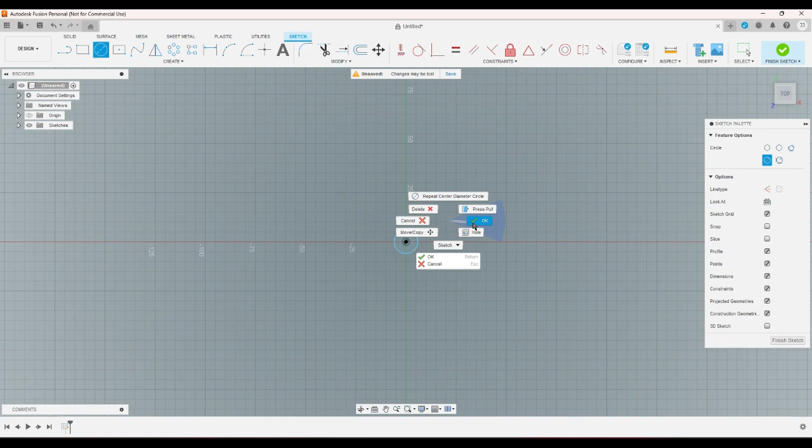So the idea was, I want to make a fan, like the kind that folds up and you open it, like those paper fans that you fold up and open and fan yourself with them. I want to make one of those, right?

But I want to make it. I obviously want to 3D print it, right? Because that's the tool I have.

Let's see, 110 would give me 220, which would be pretty big. Yeah, that'd be pretty big.

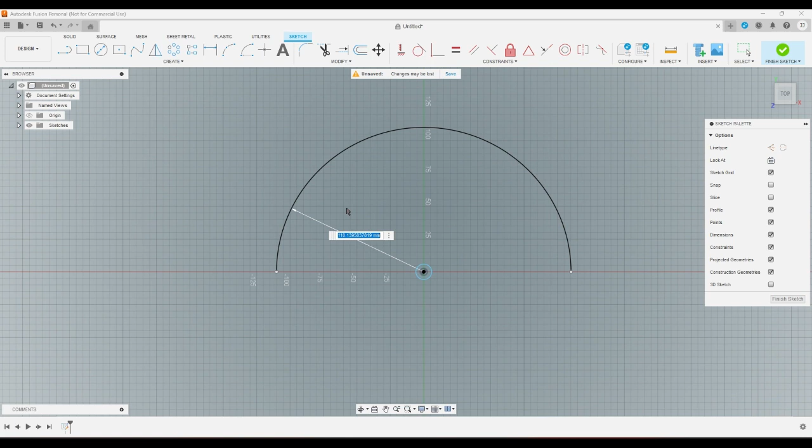Okay, so I want to make a fan, but the thing is, right, I usually make rigid things, right? But with the dividers that I've made for Yugioh, I've been making pretty thin dividers, which are like 0.6 millimeters tall.

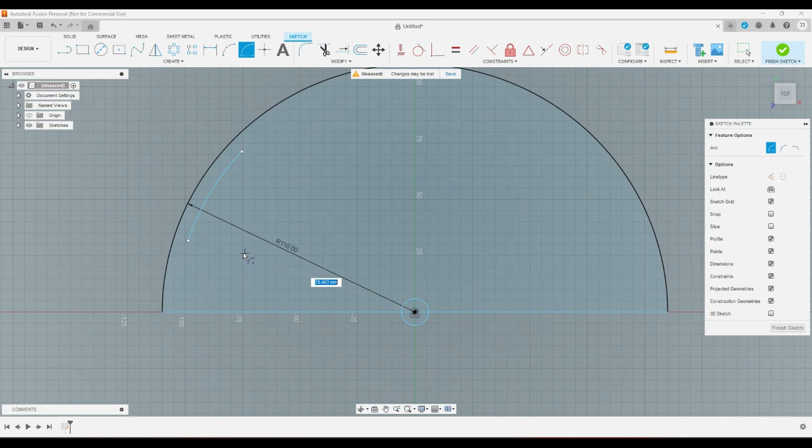So this is 220, yeah. So I wonder, right, if I can do something like this. I wonder if I can do... whoops, wrong kind of arc. Something like this, I don't know. There, and then there.

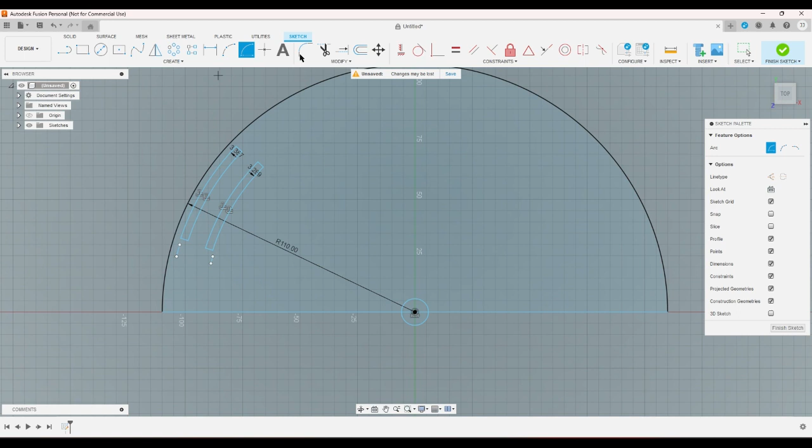So this would be a hole right here, and then to the side of this would be like this shape. And then this would be bigger, like that, right, it would go past the hole. And then... sure.

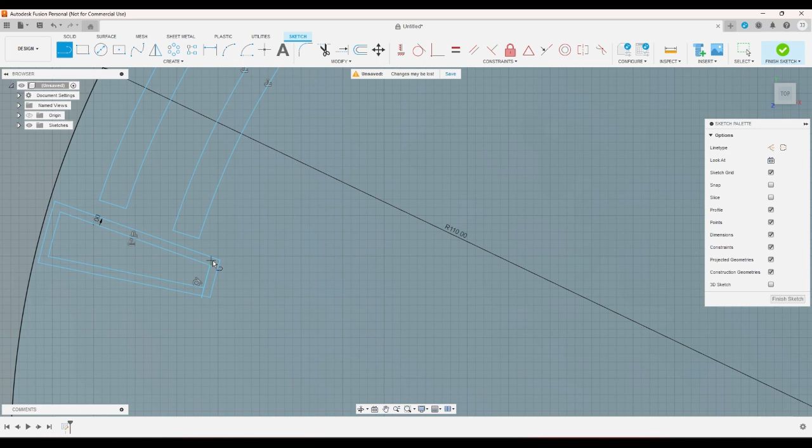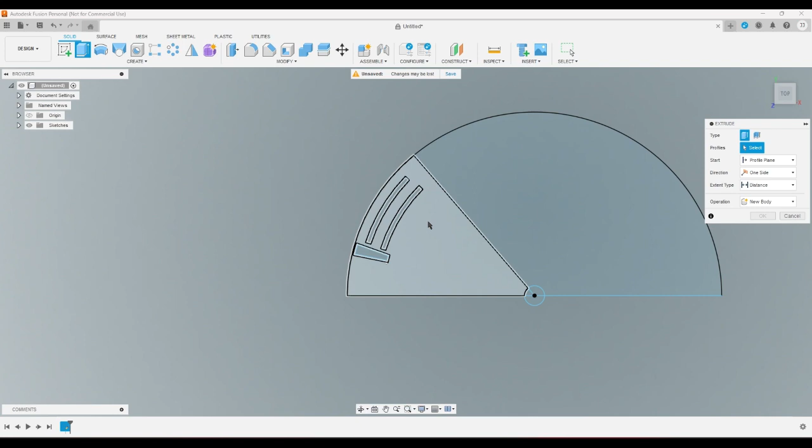Okay, so the idea is basically, and then like this. The idea is I would make a very thin segment here, and these would all be identical, right? And then this piece here would be able to slip through into this slot here, right? And basically hook the next segment onto it in order to make a fan, right? Then this piece on this segment will be on the next segment about here and be able to move about that far, right?

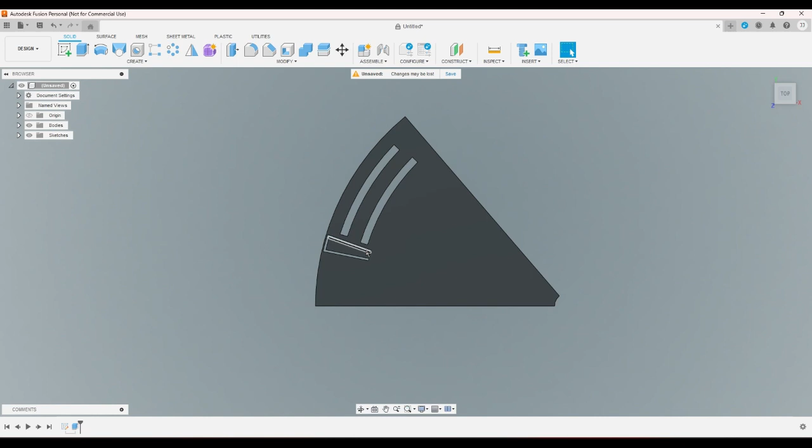So you'd be able to close it, right? But you'd be able to open it and use it as a fan, right? I need to see how big 110 is actually. 110 millimeters is pocket sized. Okay.

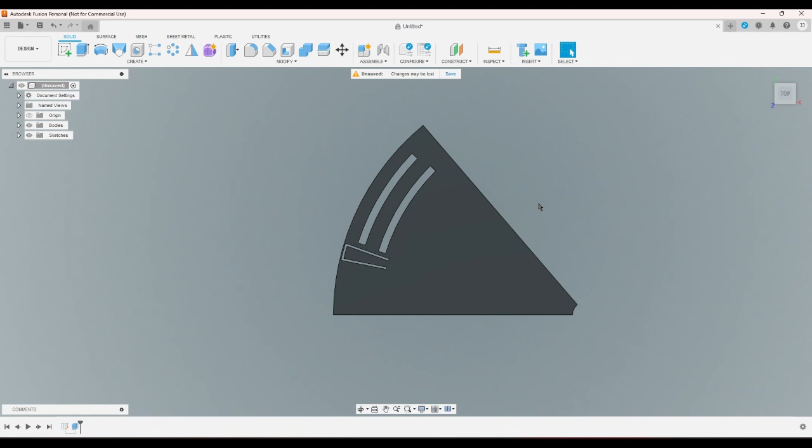So that's the idea. That's the idea behind what I want to do. Right now, though, before making any segments of this fan, right, what I want to make sure is I need to see if this would work. This here tab sliding through the slots, right? So, just gonna go ahead and delete these and start again.

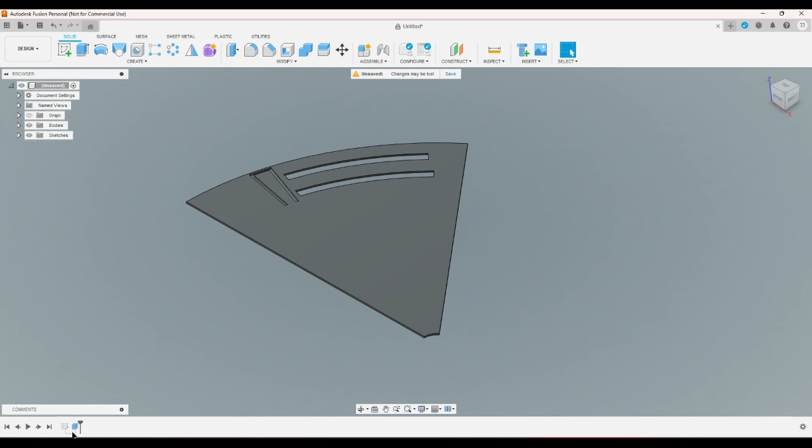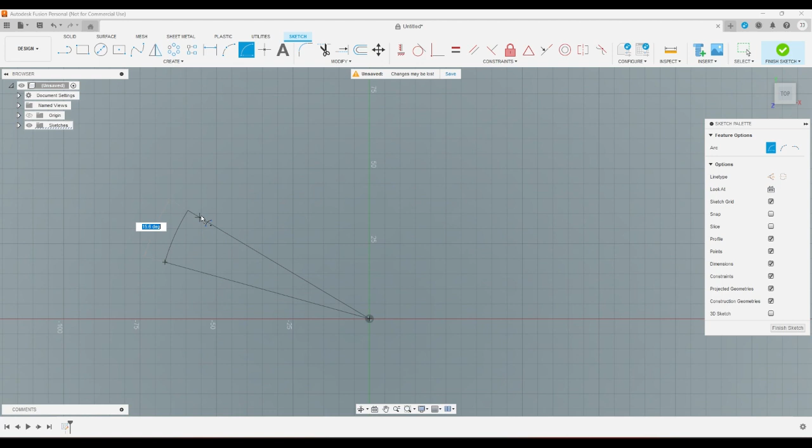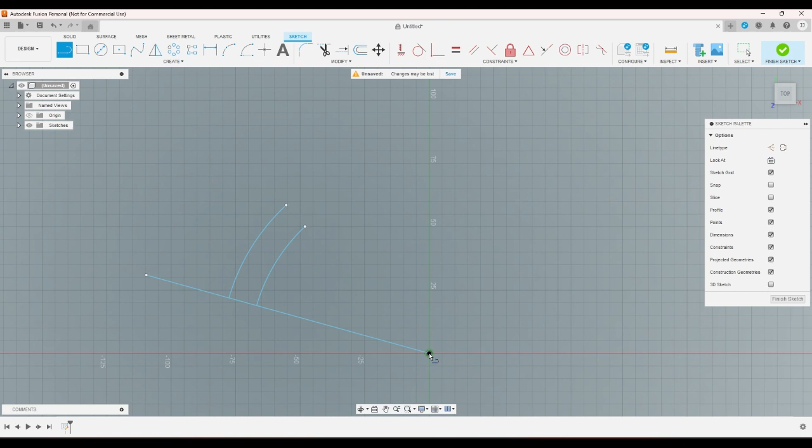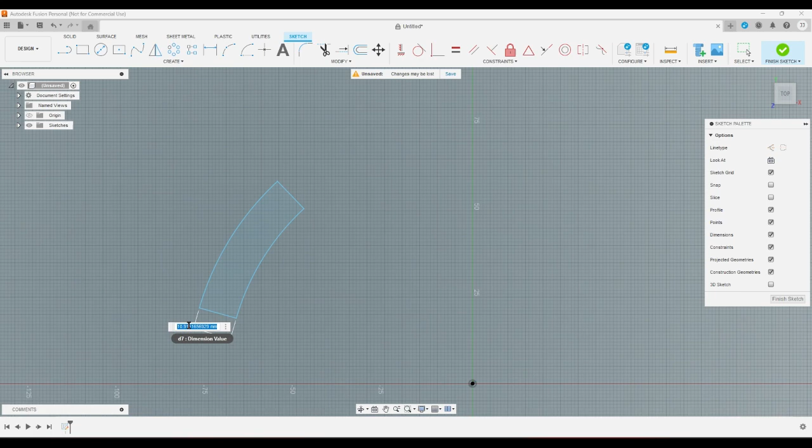So I figure if I want to give it a fair test, I probably need to do arcs. Okay, so if I trim this, right, and I make this... how about 5? Yeah, okay, and now if I offset it, I'll give it maybe 2 on either side. That kind of makes sense. I don't know if that's gonna be enough.

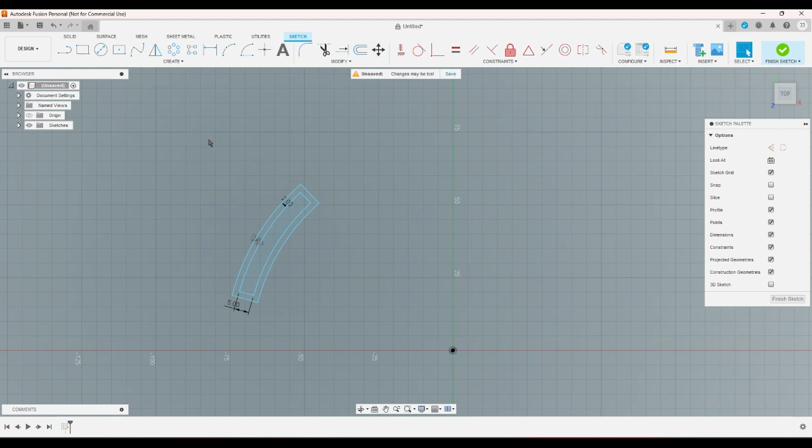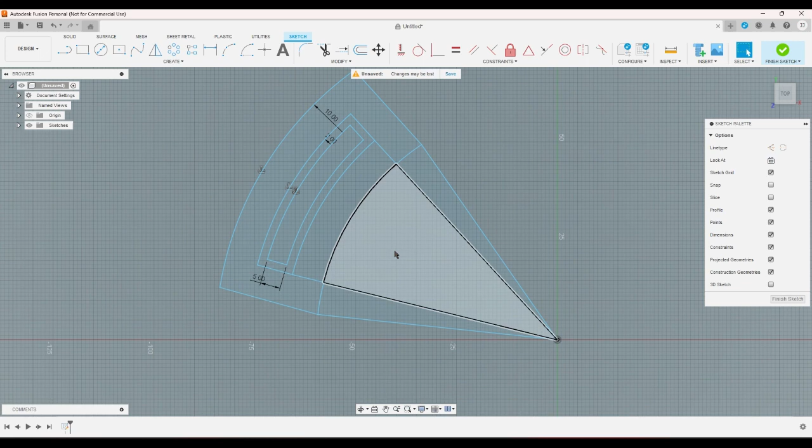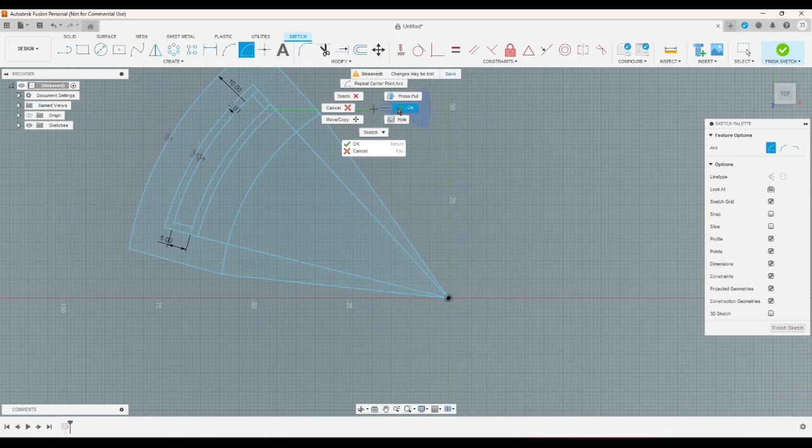Right, and then offset this again by like 3, just so that I have... that's funny, anyways, just so that I have... actually no, make it more like 10. Yeah, because I'm going to print just this, right? And then extend the arc here. Then these I don't need. I'm trying to think out what I need to do here.

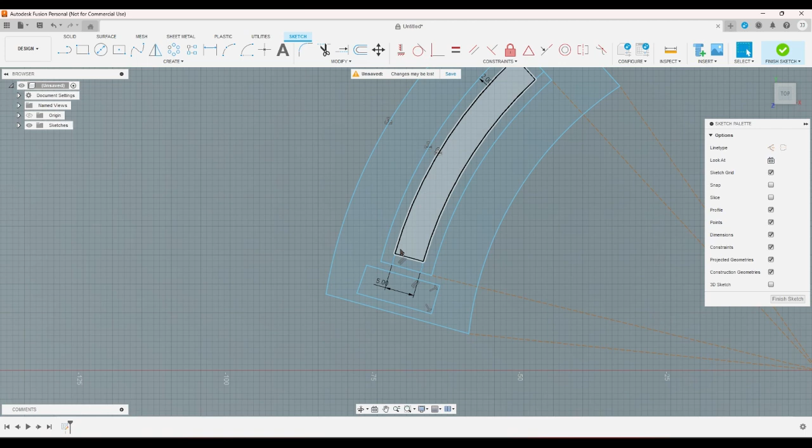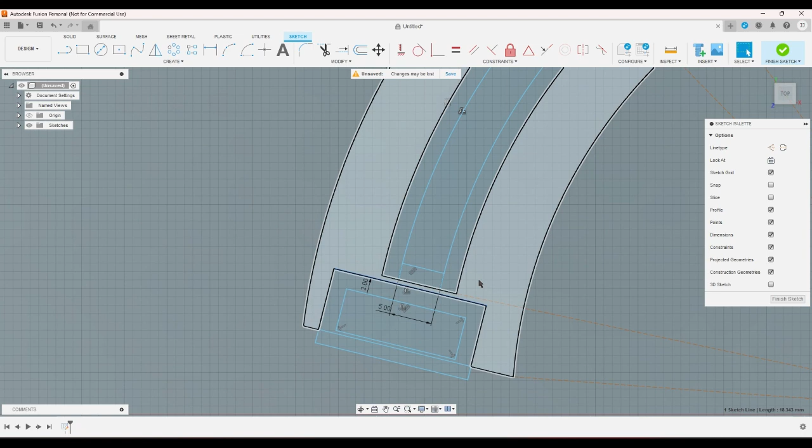Okay, I need some kind of slot, right, or slip thing. Then that's going to have to also be 2, but on the other side, which means that it's going to have to come out more. Okay, 20 then. Ooh, no, okay, that'll just be 10.

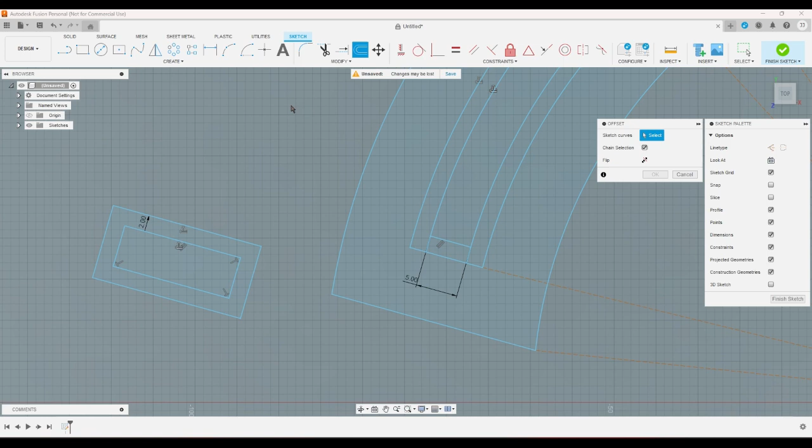And then this will be its own thing then. This, yeah. Yeah, there we go. Darn, that was 5, so then make this 5, 6, 7, 8, 9. So make it about 12. The reason I think 12 is because one more than this whole thing would be 10. And then give it a little bit more to give it the extra length here, because it's going to be bent, right? Okay.

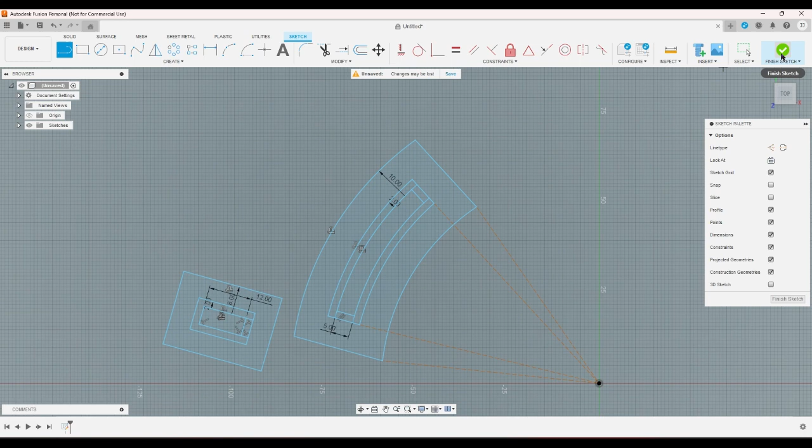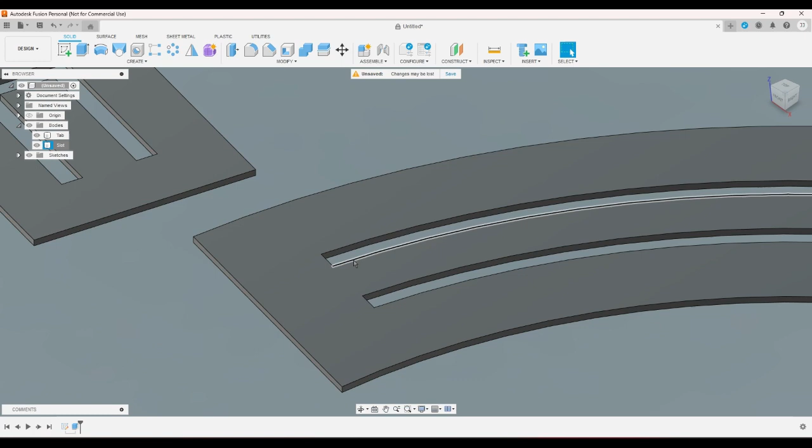So this should be enough that I can test the concept, right? And I'm going to try 0.6, right? And so this one will be tab, and this one will be slot. And then I don't even know if I need both of these slots, because the idea is supposed to be that the tab can bend so that it goes up and over, you know? But it might just need to go through one of them and be long, so I don't know.

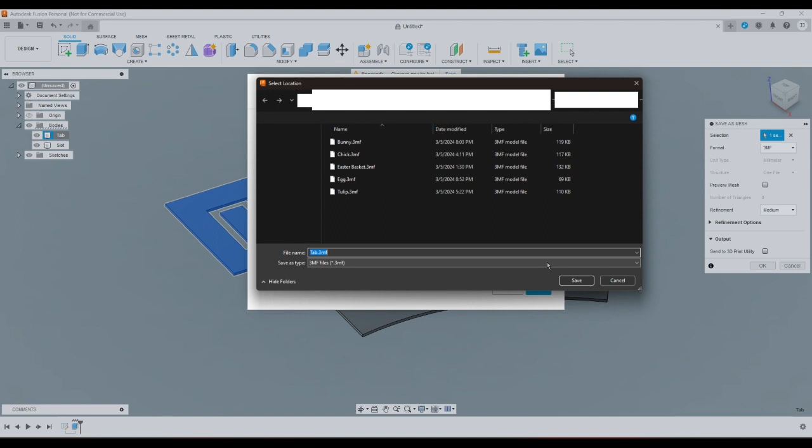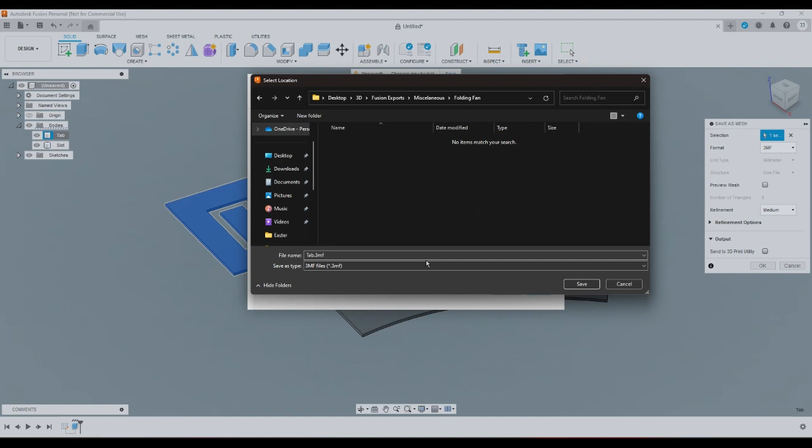Okay, and then I guess I'll go ahead and save these. Make a new folder, call it... I'm just gonna call it folding fan. Folding fan. Okay, new folder, tests. Save. Save. I mean, it's not really a folding fan, it doesn't fold, it slides.

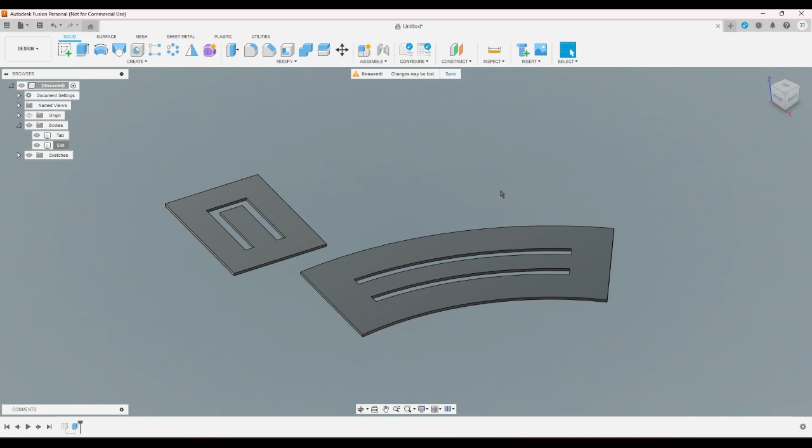Okay, and then I'll go ahead, slice, and print that as soon as I can. Okay, so I need to move the cookie cutters out. Anyways, folding fan test. Now I'm gonna slice these.

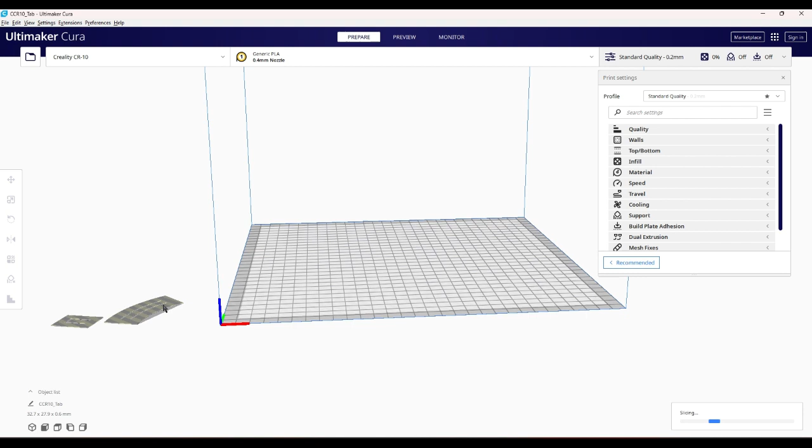Let's see what I've got. Center this and center this. Move this one out of the way, and down. 13 minutes is not a long time. I can get this printed real fast.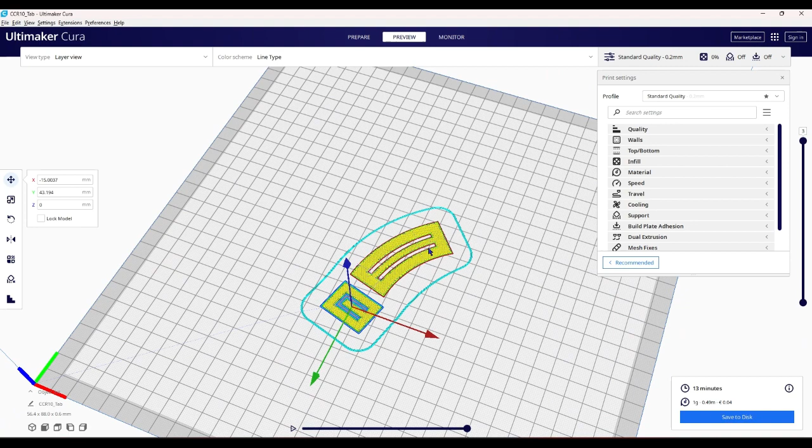Alright. Yeah, skirt would be the best. 3 layers.

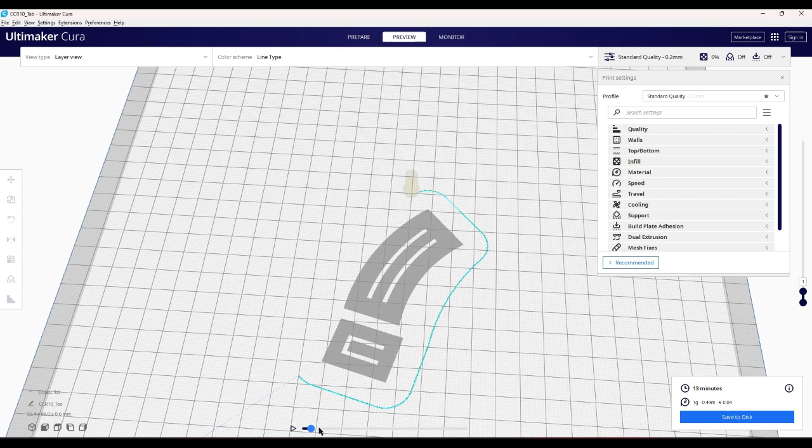Why? Okay, what is the point of the order there? It goes here.

It fills in a little bit, and then it stops filling that in and jumps to another spot. Fills in a little bit more. Stops where it was and jumps to another spot. Fills in a little more.

Okay, now it's filled in all it can in the direction it was going, so it makes sense to jump to a different spot here. And then it stops where it was and jumps to another spot, fills in all it can here, fills in all it can there, fills in all the rest of that, except for a little corner, which is understandable, jumps way back over there, then fills in that last corner.

Why? I don't understand why. Hang on, let me see something. So it's doing this corner, it's doing that. Oh, I know what it's doing. I know what it's doing.

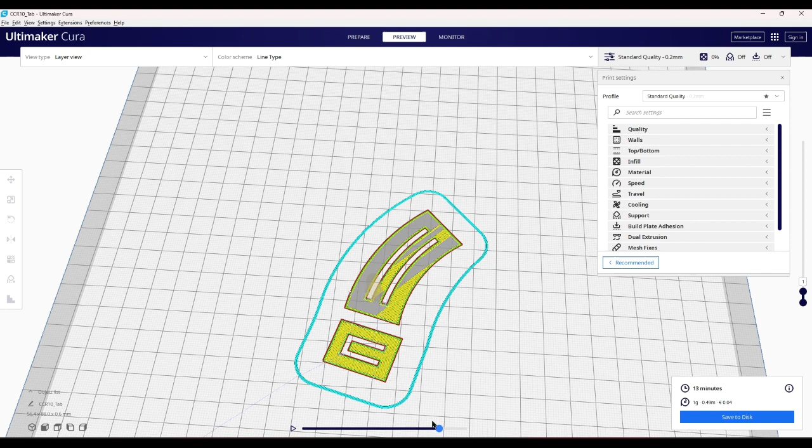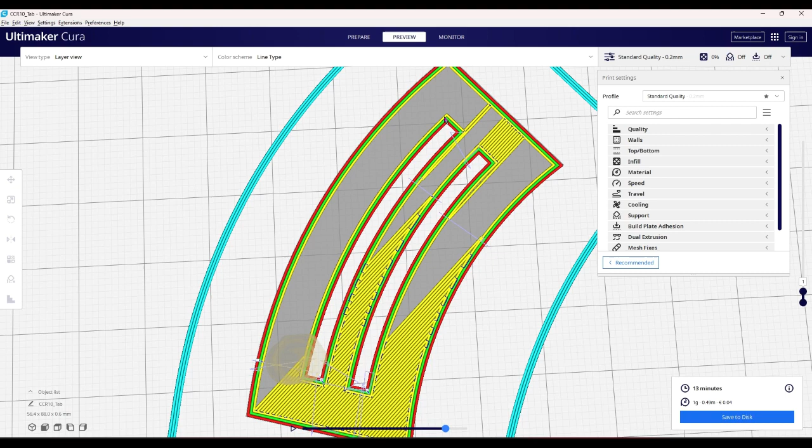See? Okay, so the people who write this program do know what they're doing, and I don't know what they're doing. I knew it. Okay, so what it's doing, right, is it's got these lines here, and these are small and thin and could possibly warp up. So it's filling in enough, right, to like hold down these lines before it comes up with the rest of it.

That makes sense, right? Is to keep the bottom layer from failing. But that's not necessarily needed for the next layer, but it's going to do the same thing anyways.

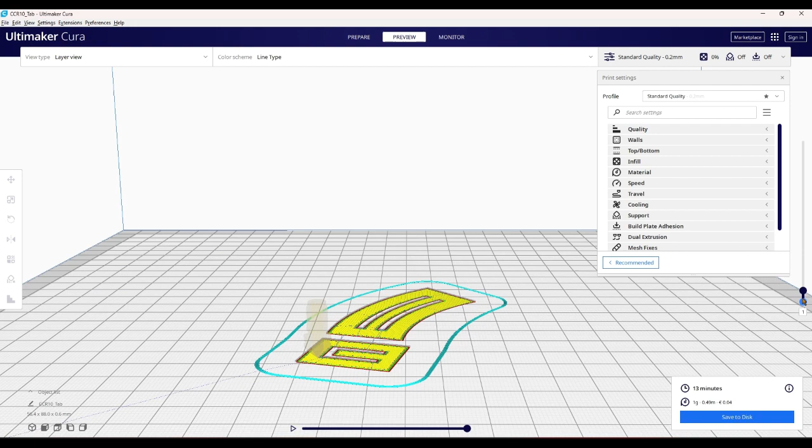And then... Okay, well this one's not jumping, is it? Oh man, there goes my hypothesis. Well, unless this one is small enough that it doesn't need to jump, because the whole thing doesn't take long enough, you know? Unless it jumps before, but anyways.

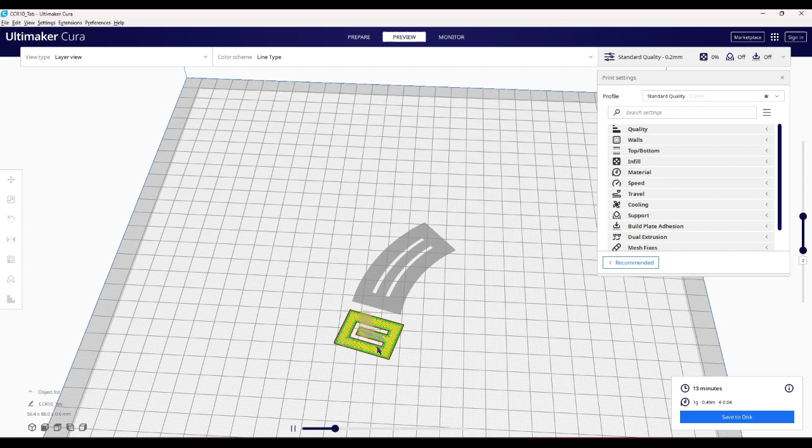Oh no! Oh no! Look, it stopped jumping. Okay. Yeah, so like on the bottom layer, it's jumping around to keep the corners in. That makes sense. Okay.

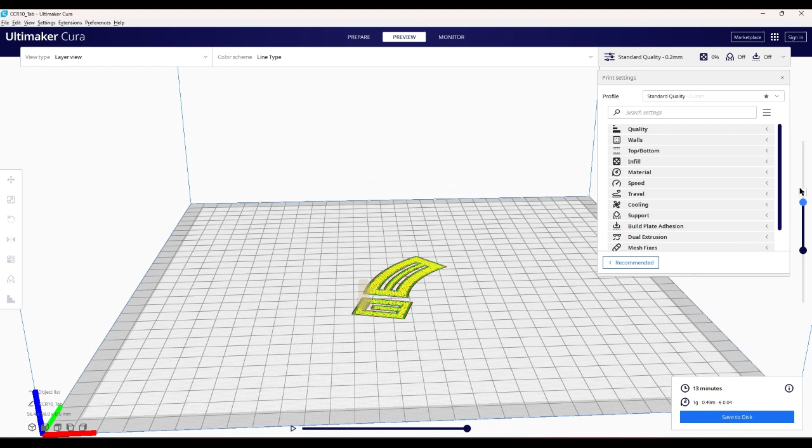Anyways, I'm gonna go ahead and save this now. New folder. Folding fan. Even though it doesn't fold. New folder, tests.

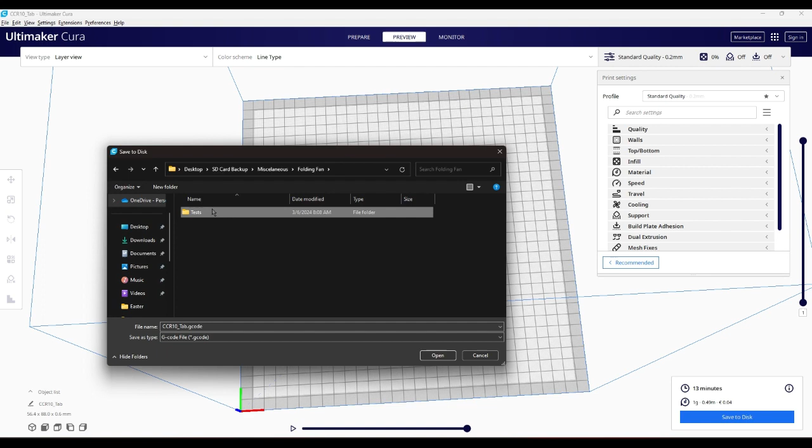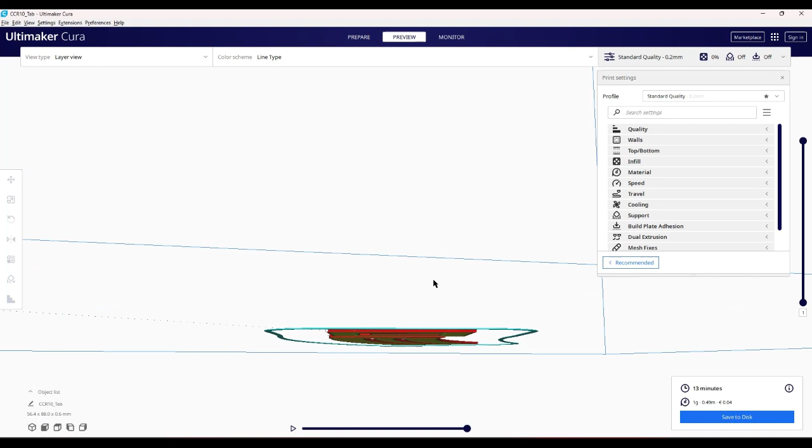Tab and slot. Alright, and I don't even know if I need the full tab here or the full slot. Because if I can get away with it, I could probably just use one of these slots. Maybe make it thinner, probably not. And a shorter tab, but I will see. I will see.

Okay, I'll go ahead and get this printed then. Okay, I've got the slot and I've got the tab. And all I gotta do is check if it'll go through. Yeah, and then it slides pretty well.

And then do I like how that looks on the other side? What if I just have this? That's better.

Would that interfere with the other ones? No, it wouldn't, because the other one would be about here if it was there, but it wouldn't be there because I'd be putting things a little bit more smartly. I think this will work pretty fine.

I still want to decide. I still don't know if I want to make the slot go through both tabs or one tab. Both tabs feels more secure. Let's see. One tab, however, is also pretty secure.

And it's not going to move this much when I have it into the thing. So I think one tab should be fine. But I might want to, I think one tab might be fine, but I might want to make it, see if I can get away with it being a little shorter.

Let's see. I think I like one tab better overall, actually. Yeah, or, I think I like the tab going through one slot better overall. Tab. Yeah. And it's pretty stuck together, so I like that, you know, because the friction's going to keep it together.

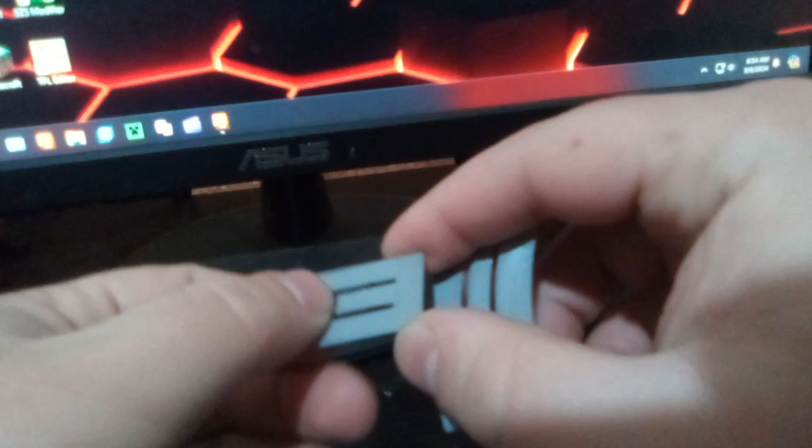So I also like it being at 0.6. I think 0.6 is going to give me a good, when I shake it, it's going to give me a good amount of air when I have a lot of them. Because if I take, hang on a second. Yeah, because if I take this, right, that's giving me a good amount of air, and it's 0.6. So if I have basically a big chunk of this, you know, is the idea.

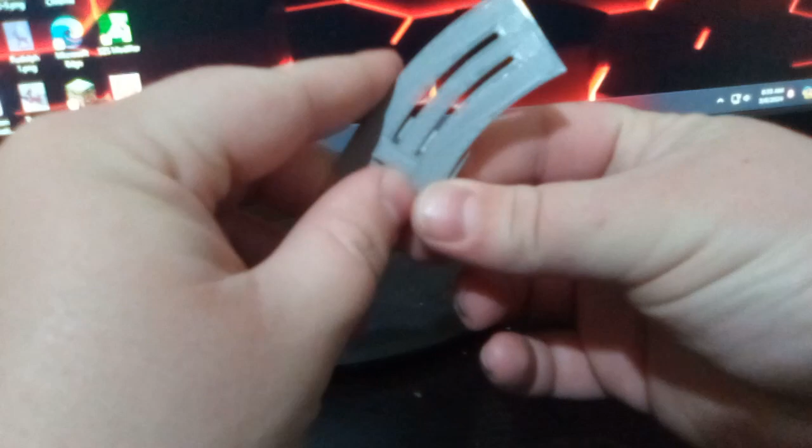So I think I'm going to go with one slot. I might make the tab not half as long, because half as long I think is a little too short, but I might make it about 3/4 as long as it is right now. I think that should work.

So yeah, and then if it doesn't work, I can always add in another slot. Does the slot have to be 2 millimeters? I think it does have to be fairly long, because if it's super short, it'll turn into, because if it's too short, right, then I'll get the shorter, the smaller this gap, the more perpendicular these will have to be.

So that's why I made it pretty big. I don't know if it has to be 2 millimeters, but 2 millimeters is working so far, so I'm not going to change it, because if it ain't broke, don't fix it. Unless I need to optimize it, and then I'll have to test, but I don't think I'll need to optimize it like that. So I think I will go with one slot and a slightly shorter tab than this, and I think that'll work. It slides pretty nicely too.